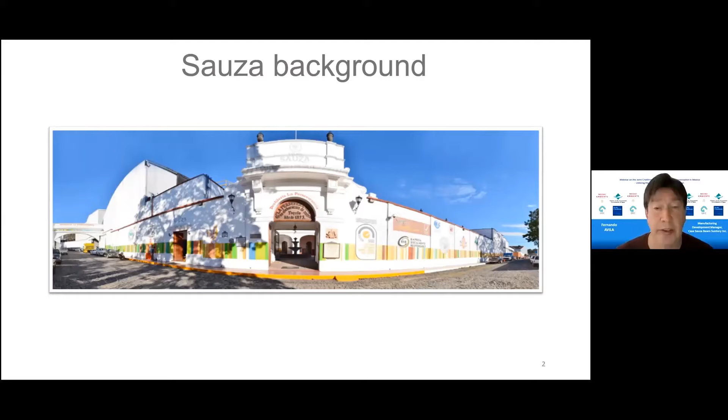Sauza has been operating continuously in downtown Tequila, Mexico since 1873. What you see here is the entrance to the distillery and bottling plant.

We do tequila. Tequila production has to be made with raw material called blue agave, and tequila production basically consists of four steps. First, extracting the sugars from the agave.

Those are very complex compounds, so we need to hydrolyze them to get simple sugars that can be fermented to get alcohol, and then we have to distill to purify and get the spirit.

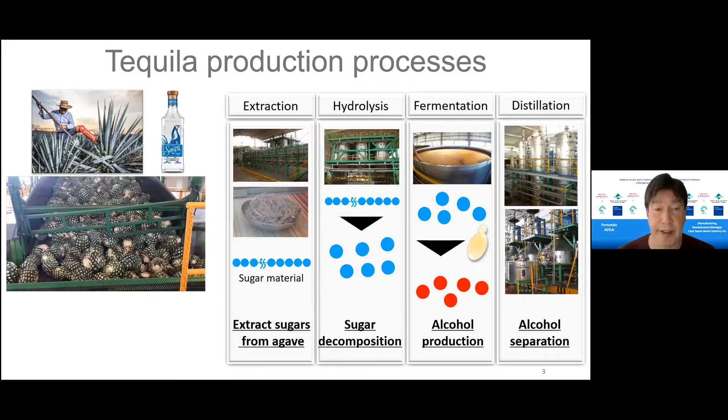Working through the COVID pandemic has been very challenging. Sauza has been very fortunate in that we haven't missed one single production day all through 2020.

To achieve that, we had to take very strict measures: home office for non-essential production employees, controlled access with non-touch body temperature checks at the entrance and exit, and continuous disinfection.

Upon entering the facilities there is periodic disinfection of all areas, use of masks, face shields, social distancing, and acrylic barriers wherever we have production areas or interaction between people.

Transportation is routinely disinfected every trip. Office spaces are also disinfected using thermal fogging equipment, and there are many stations for hand and surface disinfection.

We do a daily review of the measures and weekly updates involving all employees. Union workers have been very helpful in understanding and complying with all the measures.

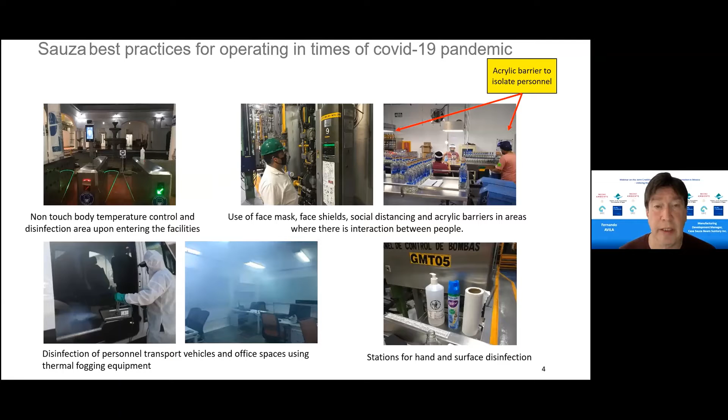So health and safety of all our employees is a must. It's the basis of our system, but environmental concern is also key to our way of working.

We have developed a carbon roadmap aligned with Suntory's targets for 2030, and we're also aligning toward a 2050 vision.

We started with the construction of a wastewater treatment plant in 2002, but we have continued with different initiatives. Key to this carbon roadmap are the two projects that have been implemented through JCM.

In 2016, going into operation in 2017, we did a project changing our regular boilers to once-through boiler, and changed from combustóleo to natural gas.

And in 2019, we started and began operating a new project in distillation using a vacuum distillation system, and I will describe the details in the next slides.

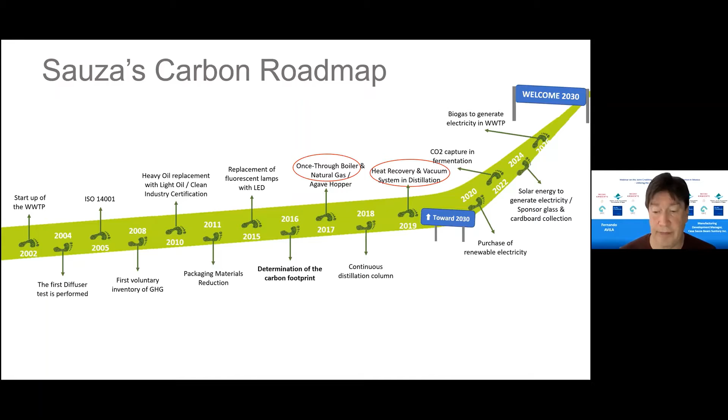Key to determining our carbon roadmap was the determination of the agave tequila carbon footprint. We did this in cooperation with the Mario Molina Research Center.

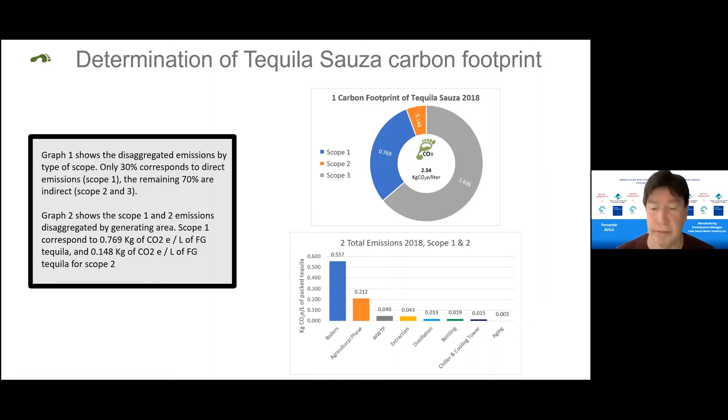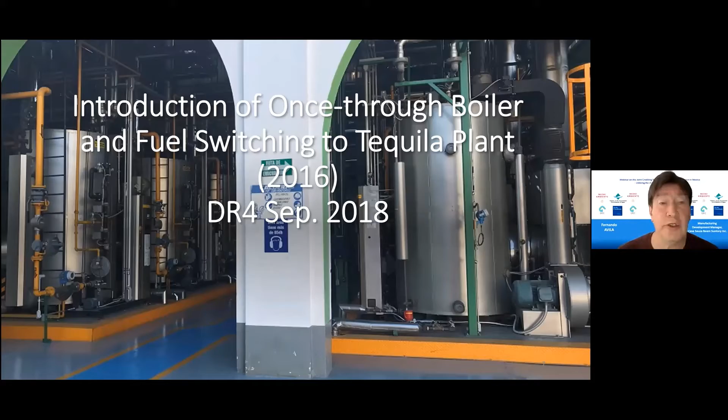So it was natural that our first project dealt with switching our boilers. We used to have old Cleaver Brooks boilers that used combustóleo.

This is a high sulfur fuel that is common in the industry in Mexico. We had 6 boilers, and actually 2 of them were from 1971, so they were very old.

We needed to use them to produce steam for the diffuser used in the extraction of sugars, for the autoclaves used in cooking the agave juice, and for the distillation.

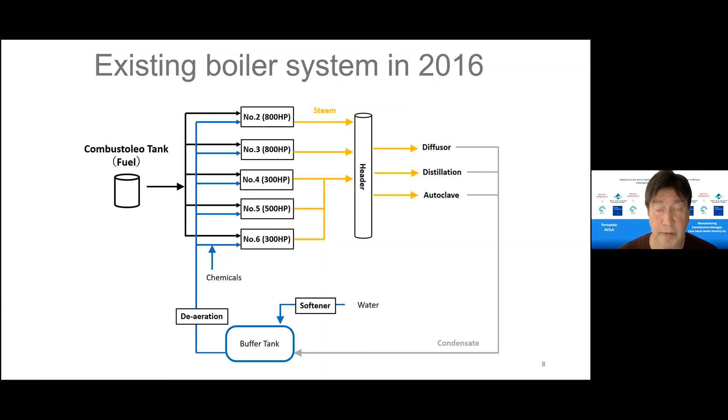The project consisted of switching over to Miura boilers, a Japanese company that produces once-through boiler systems. They have very nice features. First of all, they are very efficient. The old ones had an efficiency of like 79%, but now we're up in the 90s.

We can do a modular system and take care of the steam load fluctuation, because in a given day, steam requirements are not uniform. They require less manpower. It's automated. The control system is set up so that we have an early alarm connected directly to Miura, and we can do preventive management. So far, we have not had to do any corrective maintenance. Once we do the numbers, this system has less maintenance cost and operation cost.

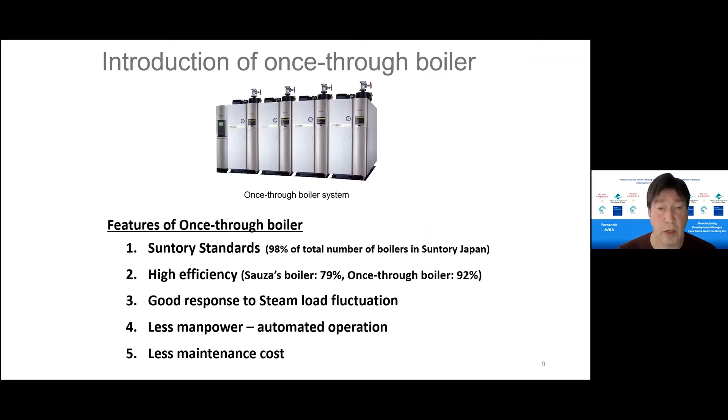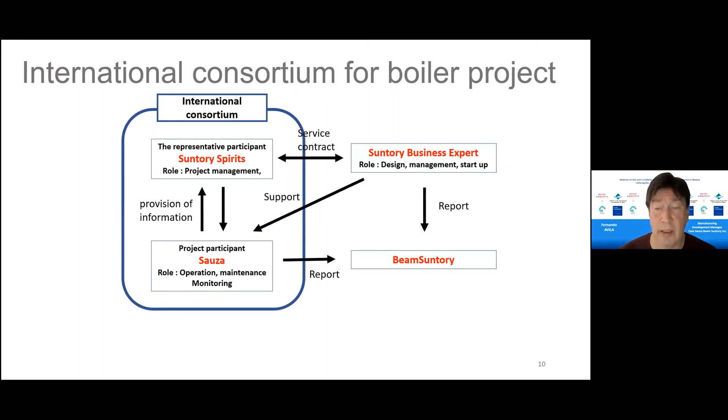So what we did was set up a consortium with Suntory Spirits experts from Japan, and with Sauza, partnering with a Japanese supplier, Miura. And for this, we applied for JCM and used the project to change into a system that has 6 Miura boilers.

You see here all the parameters that were used to measure the success of the project. Power is guaranteed. The quality of steam was tested, and it's very clear, very pure steam. Quality of water, again, is taken care of. We only use groundwater at Sauza.

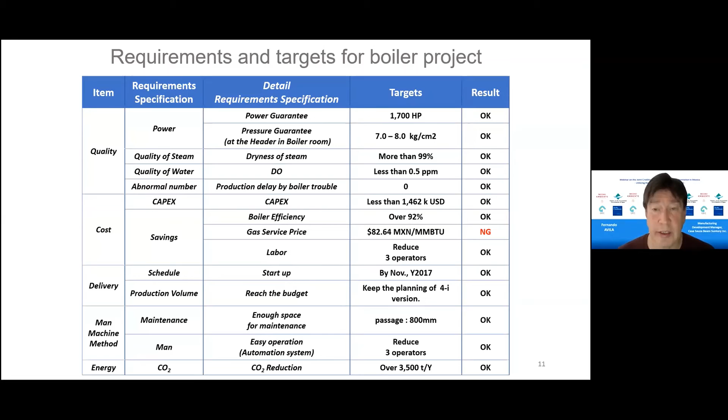At the bottom, you can see the main result. We got a 17% energy savings in steam production and 4,000 tons per year of GHG emission reduction. So this was the first project that we did, and it tackled our number 1, scope 1.

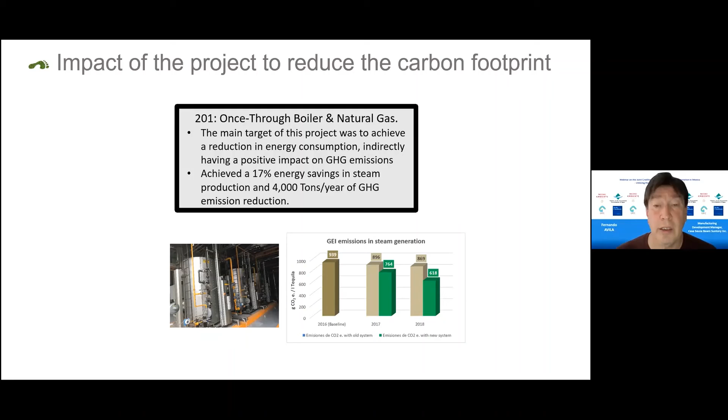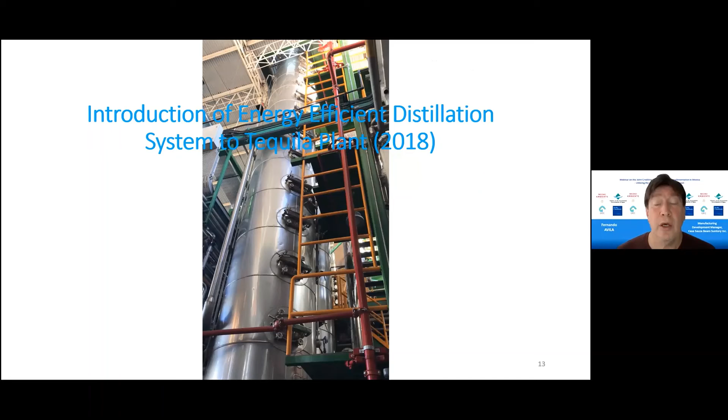The next project we tackled was the introduction of an energy efficient distillation system. This came about because when we did a joint analysis in 2018 with Suntory and with our team, we highlighted that the main loss of energy was in distillation. Vinasses, which is the main refuse out of tequila production, went out at around 100 degrees centigrade, but that heat was not being used.

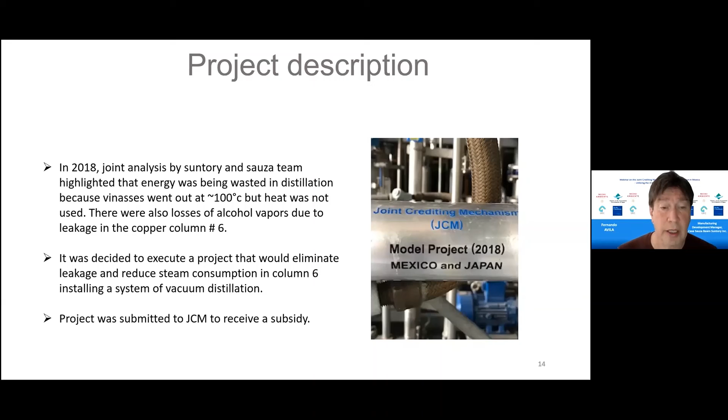And the second stage of the project, one column was reconstructed so that we could do both distillations required by the tequila norm in the same column, but using the vinasse that went out of column number 3.

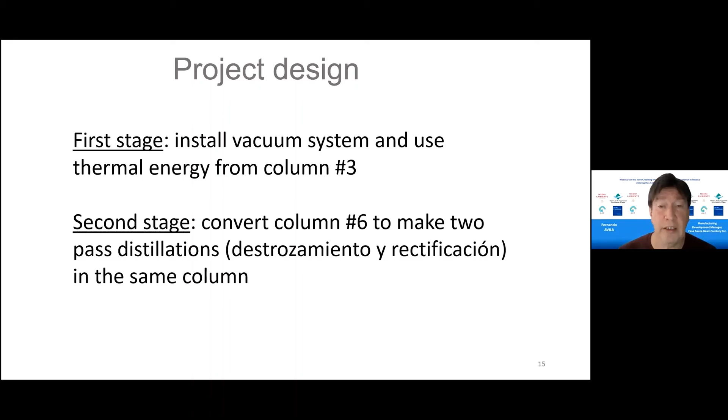All through the execution of the project, teamwork was essential. We worked with our partners in Japan, Monozukuri experts from Suntory. The supplier was Felipe Gomez Ingenieros from Spain. They constructed the column and installed the new system. And of course, our operators. The leaders for this project were Tatsuhiko Norimoto from Japan and Jose Rosas from Sauza.

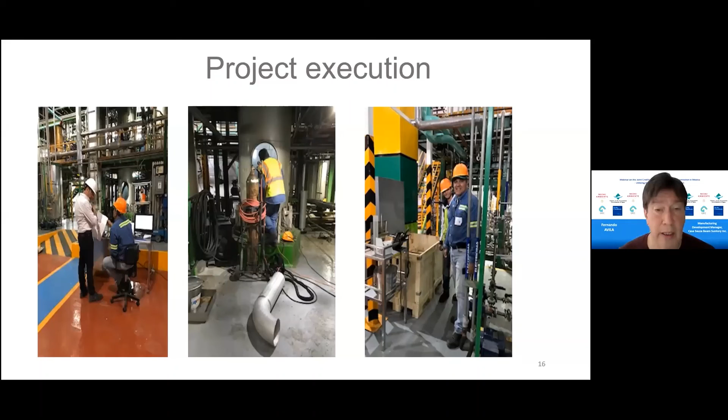Key to this project was maintaining the essential profile of our brands. So we had to ensure that not only we got the energy savings, but the congeners, the compounds that make up the aromas and flavors of the tequila, were being maintained.

Also, controlling the operation, one technician can take care of all the operations from a control booth, and this was done by programming a PLC directly from the column into the control booth, so only a technician is needed to operate the whole system.

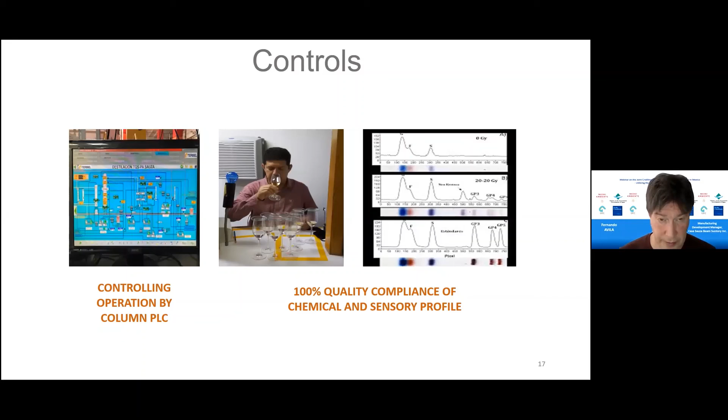Our energy savings were 85% with respect to what we had before the system, and we also reduced the GHG emissions in the same proportion.

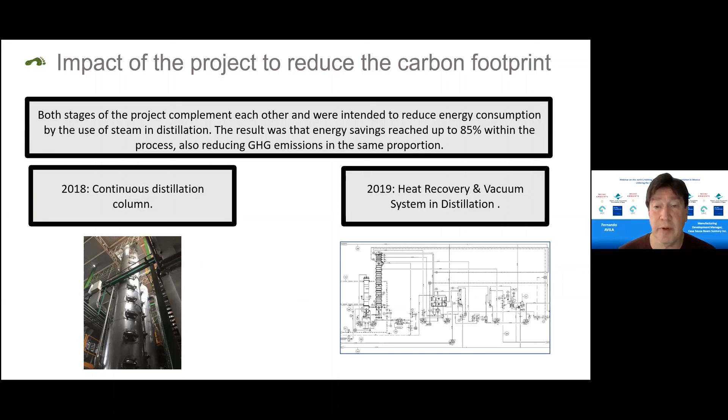GEC has been visiting and inspecting both the boiler project and the column distillation, and we enjoy their visit, and we hope that we can see each other again once the current COVID situation gets under control. And I'm glad to welcome any questions or comments.